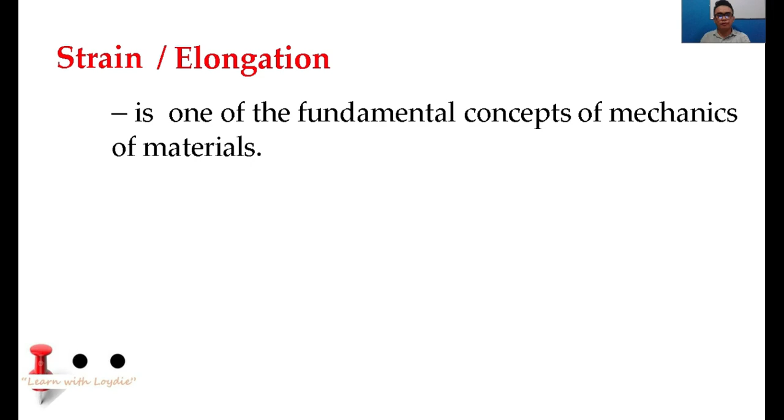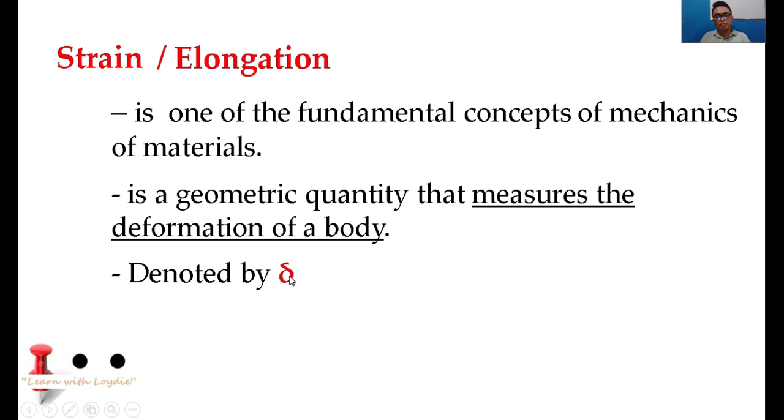Ang kaning strain, other name ani is elongation. And this is one of the fundamental concepts of mechanics of materials. And this is also a geometric quantity that measures the deformation of a body. Nagpasabot change in length. So yang sukdon ang unsa ka taas na stretch imuhang material. And this is denoted by this Greek alphabet. Unsa ka ani nga Greek alphabet? Ang tawag ani small Greek alphabet delta.

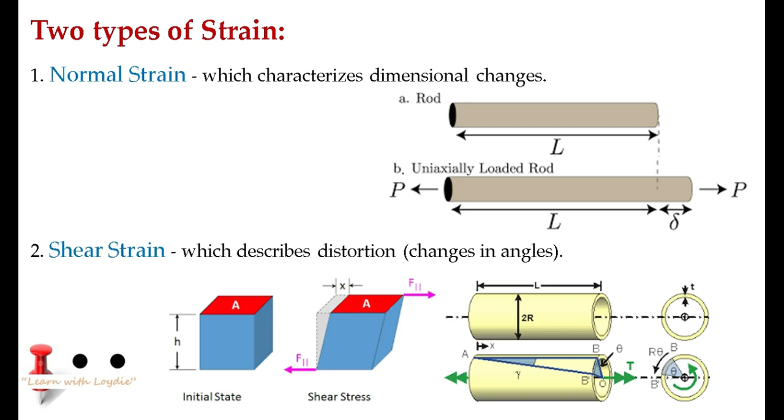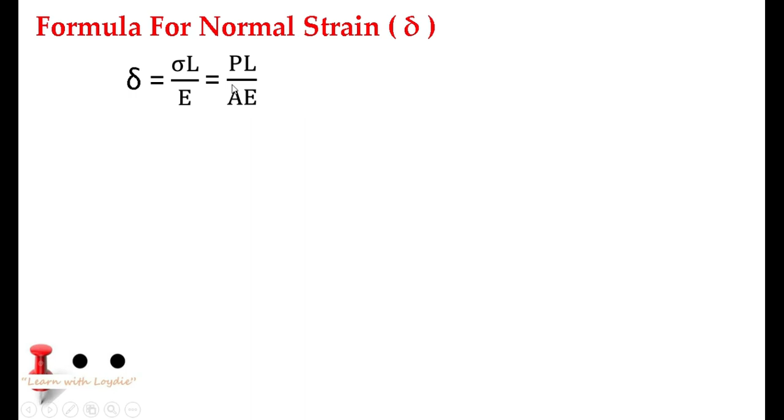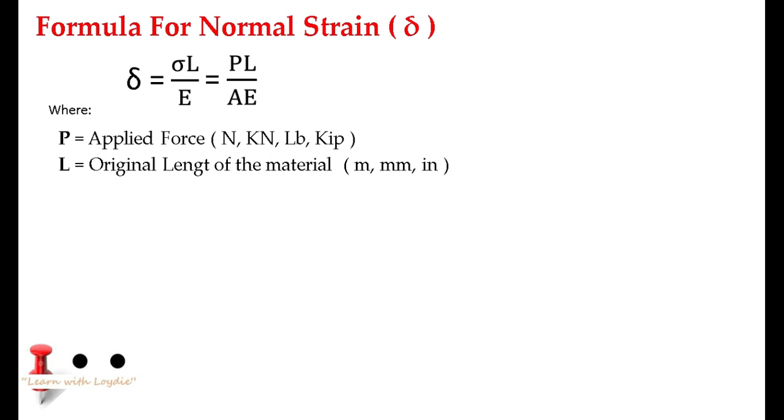Unsa ka ang formula sa strain? We have strain equals sigma or stress times length divided by E. We can simplify stress nga force over area. Naa tay equation karon nga PL over AE. Unsa may pasabot ani? Ang imong P diri mao ni imuhang applied force, naa kay unit nga Newton or pound in English. And then ang imong L nagrepresent ni sa original length sa imuhang material. We have A mao ni imuhang area. And then E mao ni ang modulus of elasticity. Ang unit aning E is equal sa unit sa imuhang stress. We have Pascal or we have PSI.

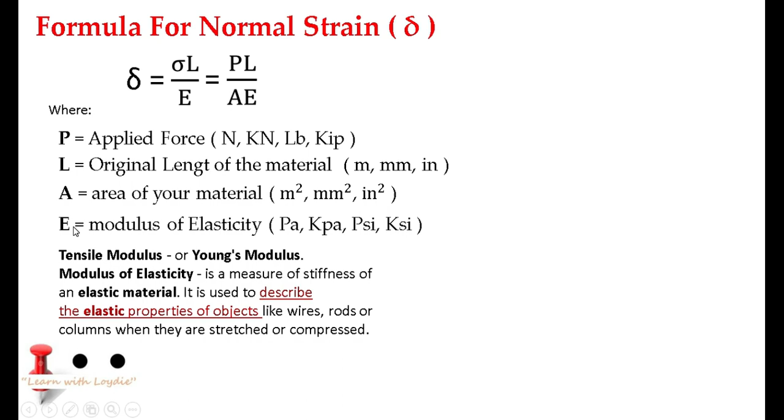Para kaning formula dili lang malimtan, himuan nato nig meaning. Meaning makarelate gyud ang mga naay hinigugma. Unsa nga meaning? Please lang ako'y ingatan.

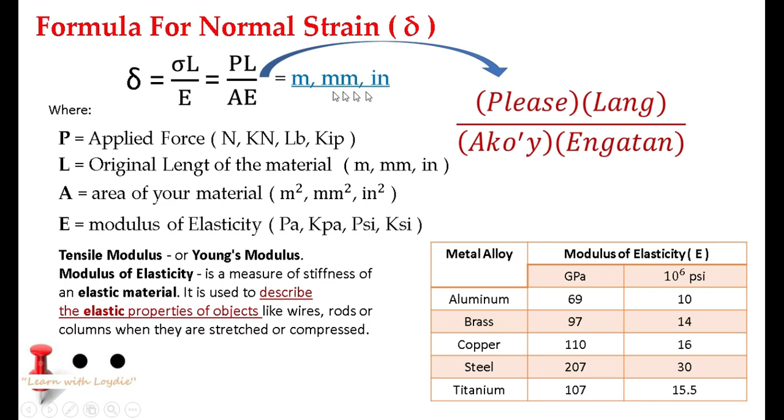And in the next presentation, akong i-prove nga ang unit gyud sa strain is also a unit of distance. From the equation of strain, atong i-prove karon nga ang unit gyud niya is also a unit of distance. Mag-start ta sa metric system. So we have strain equals force Newton times length meter divided by area, we have meter squared, times E, nga ang unit is Pascal, we have Newton over meter squared. So from here we can cancel your area and then force. Therefore, ang remaining unit naa tay meter.

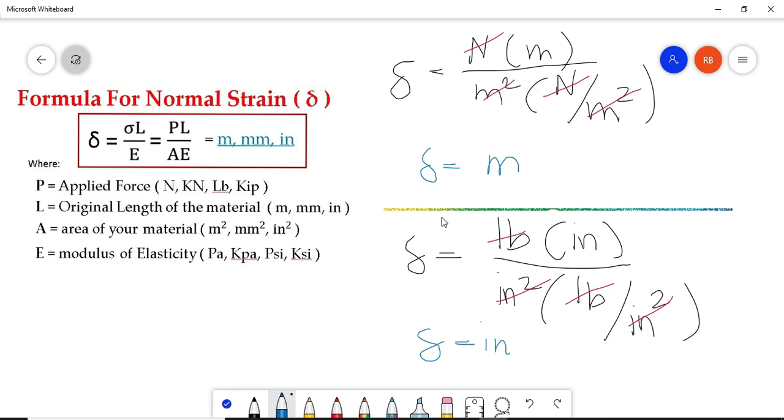Likewise, in English system, we have pound times inches divided by area, we have inches squared, times the value of E nga PSI, we have pound over inches squared. Again, we can cancel area and also the force. And the remaining unit, we have length nga inches. Therefore, from these two solutions, nakita gyud nato nga ang unit sa strain is also a unit of distance.